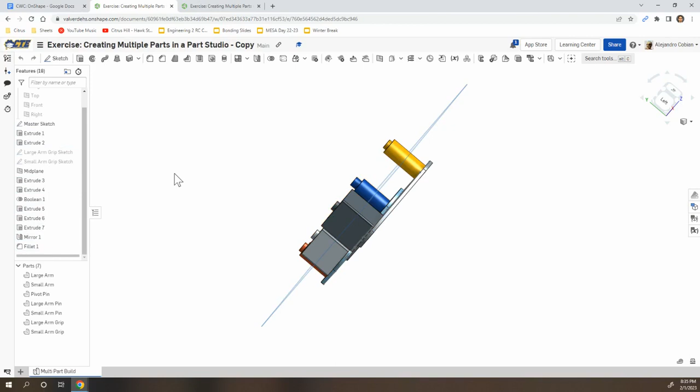For step 1, we need to create a copy of this public document right here. Notice we have a 2-dimensional sketch. Go ahead and click on this and make a copy. This is what you should be seeing.

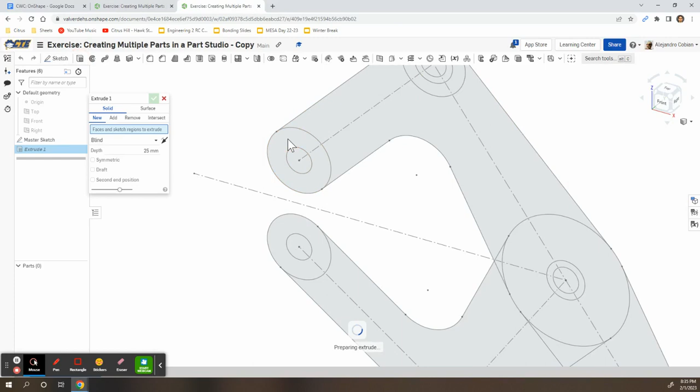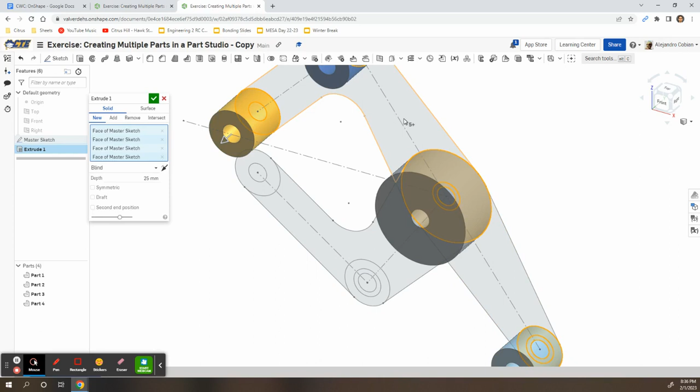For step 2, we're going to extrude this large arm. Go ahead and click on extrude. You're going to select the following circles, this one right here, and notice we are on the front view here. We're seeing the right, the top, the front, but we're working on the front plane. We're selecting this circle, also this one, creating that one, this one right here, and we're also selecting this portion here and that. Let's curve this around. We're also going to select this and this little item right there. This will be solid, new, blind, and the depth will be 5 millimeters.

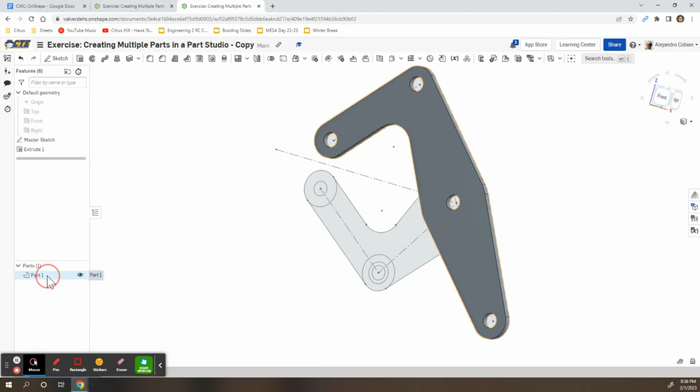Let's go ahead and switch that and hit the check mark. This is what we should be seeing. We're going to go ahead and rename this as large arm. Go ahead and right click on part 1, rename large arm. Right here, we're just being reminded in step 3 to make sure that we're viewing the master sketch.

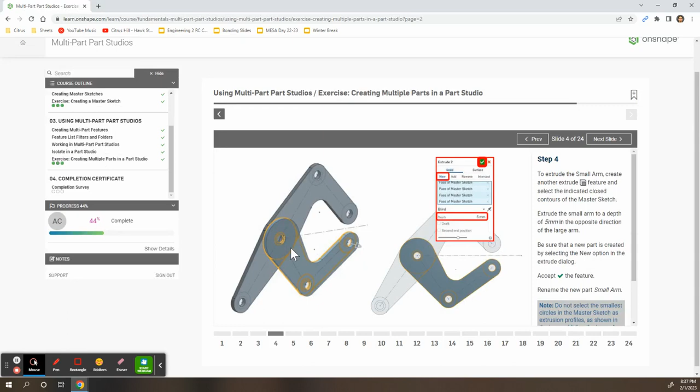For step 4, let's go ahead and hide the large arm. We're going to go to the back side, and at this point, go ahead and click on extrude. We're going to create this piece right here for the small arm. Go ahead and select this circle, this inner circle right here. Let's make sure we view the back piece, this portion, this little point, this arm here, this middle circle, this circle right here. At this point, make the depth 5 millimeters.

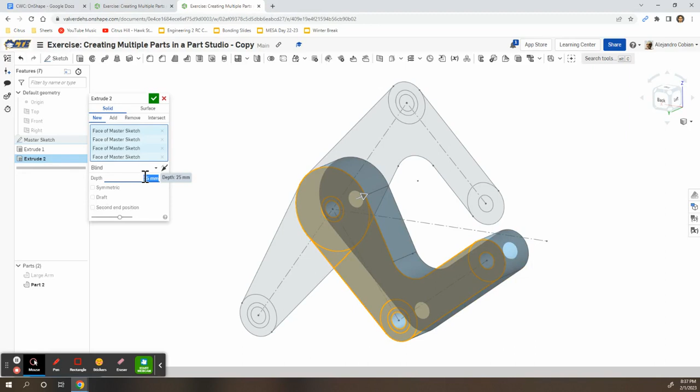Notice that we're also creating a new part. At this point, let's go ahead and view the large arm. If you notice, the small arm and the large arm are connected together, so let's go ahead and reverse the direction. We want to make sure that they are on different planes. Go ahead and hit the check mark.

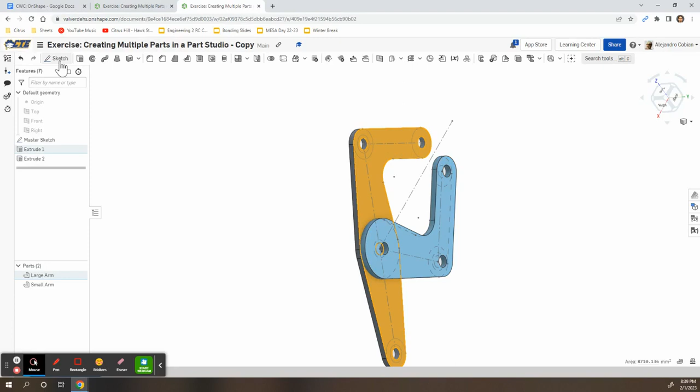They are separated. For step 5, we're going to create a sketch plane on the large arm. So once again, we are sketching and we're on the face of the large arm, but we're on the back side of the large arm. We're going to hide the master sketch and rename this as large arm grip sketch.

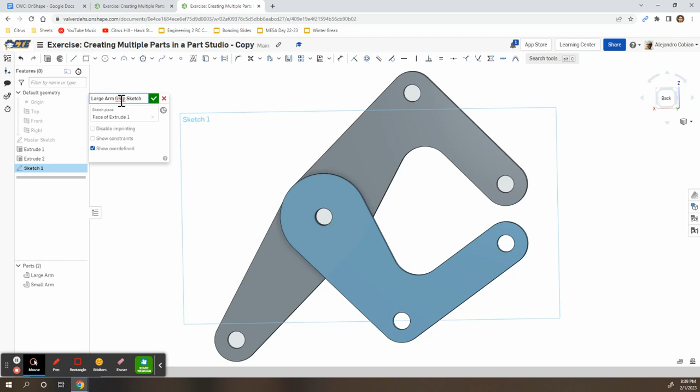Step 6, we're creating this square with a triangle. Let's zoom in this area here, make sure we're on the back side, and we zoom in. At this point, let's go ahead and click on use project convert. We're going to click on the circle, and notice now our circle is part of our large arm grip sketch.

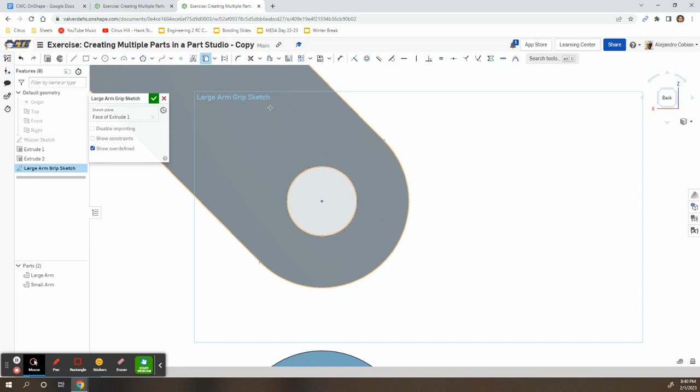Let's go ahead and click on center point rectangle. Click on the point right at the center of the circle. We're going to make this a little larger. We're going to make our triangle on the inside.

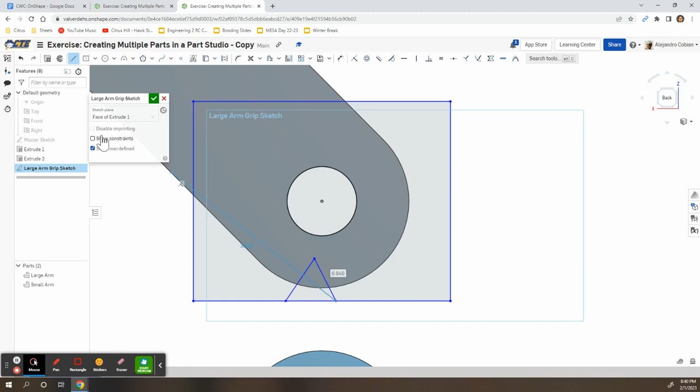So far we have these relationships where all of the points in the triangle are connected, and the endpoints of the triangle are connected to the rectangle's bottom line. And then we also have the rectangle centered at the center of the circle.

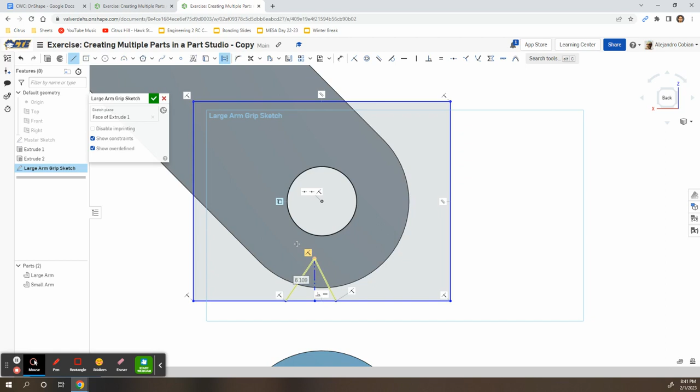We're going to also create a construction line that is connecting the rectangle's bottom line to the top point of the triangle. At this point, let's make sure that this construction line is vertical, so add a vertical relationship to it.

We're also going to place this line at the midpoint of our bottom line of the rectangle. Go ahead and click midpoint and select this line. I want to make sure that these two lines are equal to each other.

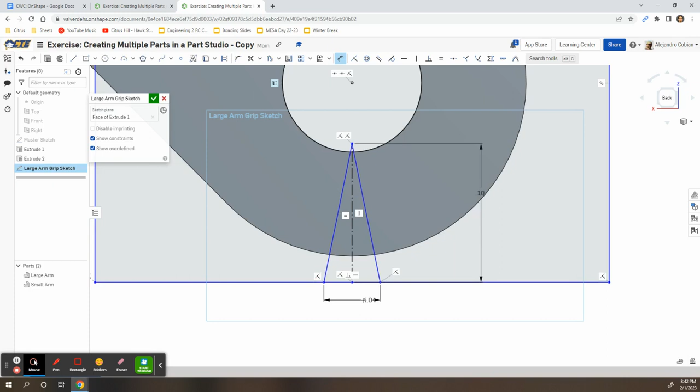Now for some dimensions, the height of this line right here will be 10 millimeters. The distance from this point to this point will have a value of 10 millimeters. Now we want to go ahead and view our master sketch, and we're going to add a distance from this bottom line to the master sketch with a value of 1 millimeter.

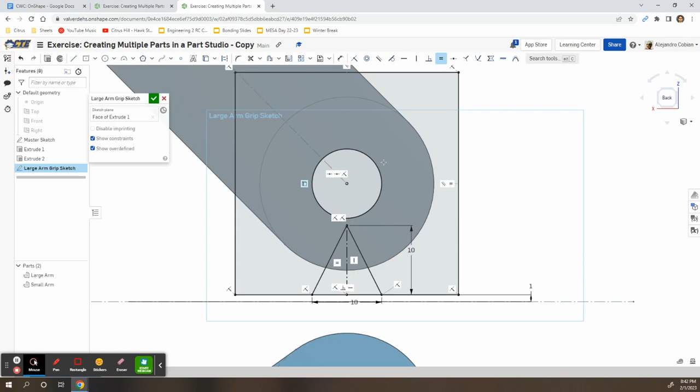For a square, let's make sure we add some equal relationships. Make sure that every line looks black, that we have no blue lines. In this case, everything is fully defined. Let's go ahead and accept this sketch.

At this point, we're going to create another sketch on the small arm on the back side. So let's zoom out. Let's go ahead and click on sketch. Let's hide our master sketch, and let's click on our small arm. We're going to zoom in on this area here.

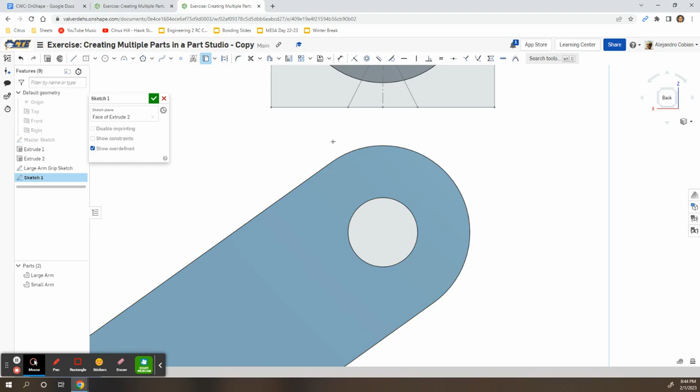For step 8, we're just replicating all the dimensions that we used for the square up above. So let's go ahead and repeat this process. Let's project our circle on the small arm, and let's go ahead and create a center point rectangle centered at the origin of the circle.

We're going to create our triangle, just like what we did earlier, and show our relationships. We want our construction line right at the midpoint. Notice I'm already creating a midpoint relationship with the top line and the bottom point of this triangle. Now for our relationships, we're setting these lines equal to each other, and then making sure this line right here is vertical. We're going to add a few dimensions.

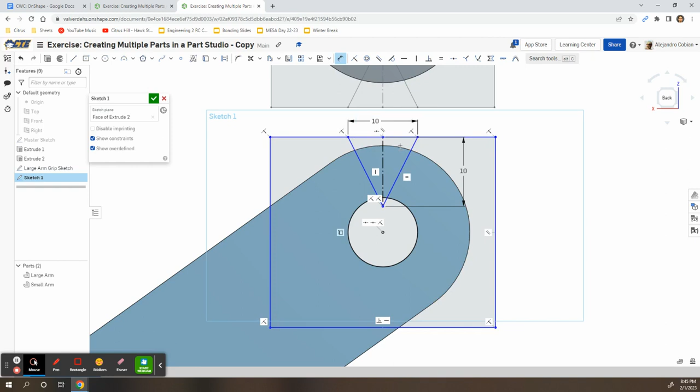This line will have a length of 10 millimeters, and the distance between these 2 points will be a value of 10. We're also going to set this line equal to this line here, and this line equal to this line.

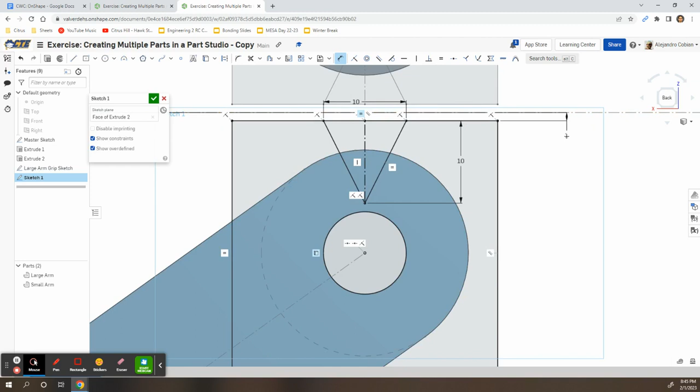However, we're missing one item, so let's click on Master Sketch. At this point, we need to add a dimension for the distance between this top line and the center of the master line, which is a value of 1. At this point we're good to go. Let's accept this, and we're going to rename this as Small Arm Grip Sketch.

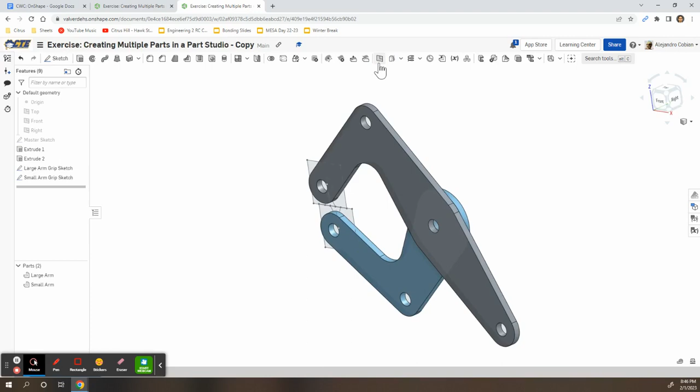Step 9, we're going to create another plane. Let's go back to our front side and hide our master sketch. Select plane, and click on the face of extrude number 1. Notice we're selecting the front plane. We're offsetting this plane by 25 millimeters, and if you notice, we're going in the opposite direction. Go ahead and rename this as midplane.

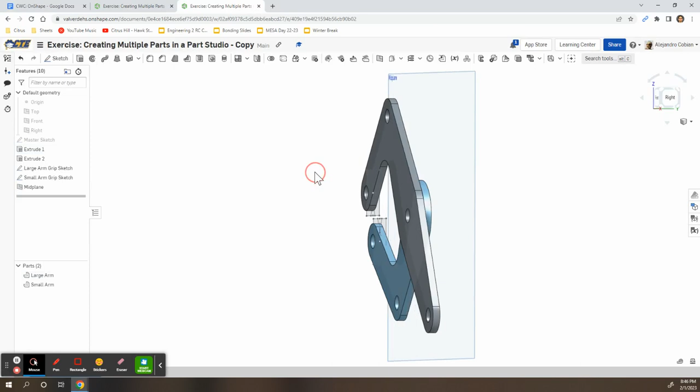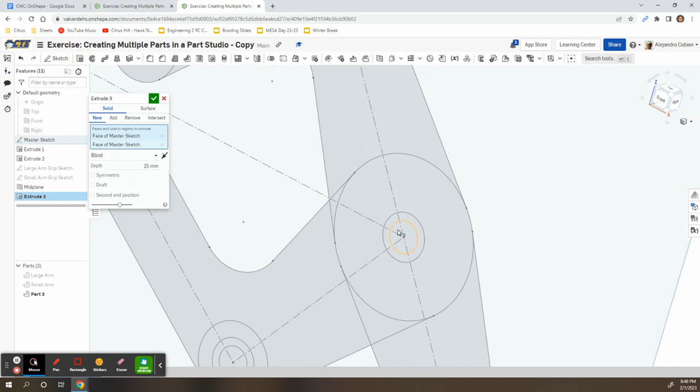And accept. For step 10, we're going to create these 2 pins right here. They're both connected to the large arm. So let's hide our large arm and then our other 2 sketches, and all we want to view right now is the master sketch. Let's click on extrude. We're going to select this small circle, the medium-sized circle, then this circle here, and the medium-sized circle again.

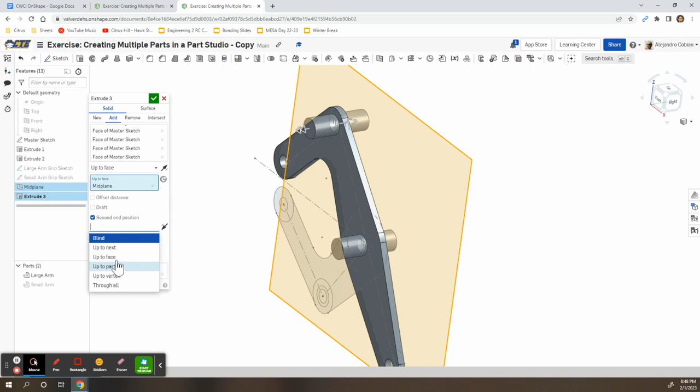At this point we do want to select solid new. We're going to create up to face, and select the midplane. Now let's view our large arm. We're going to add a second end position, and click up to face, selecting this face of the large arm, the front face of the large arm. However, we want to make sure this is a new item, so once again click solid new, and accept.

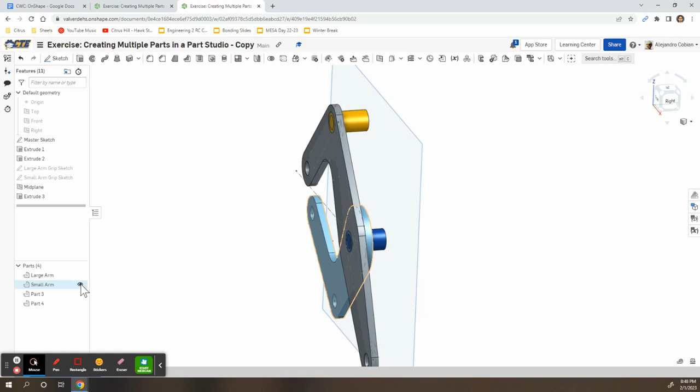Notice we have 2 pins here, and now we can view the small arm. We're now going to rename this part right here as a pivot pin. So rename part 3 as pivot pin, and the yellow pin will be called large arm pin.

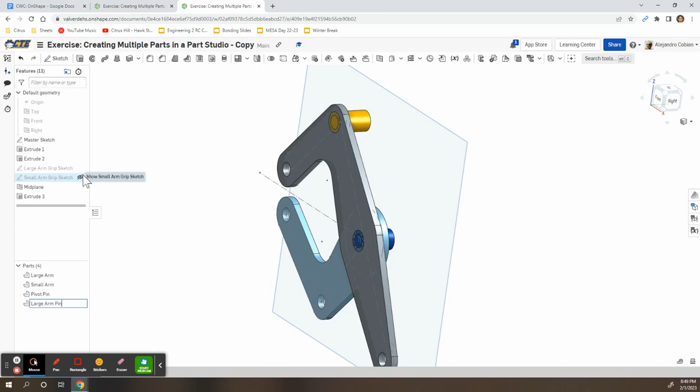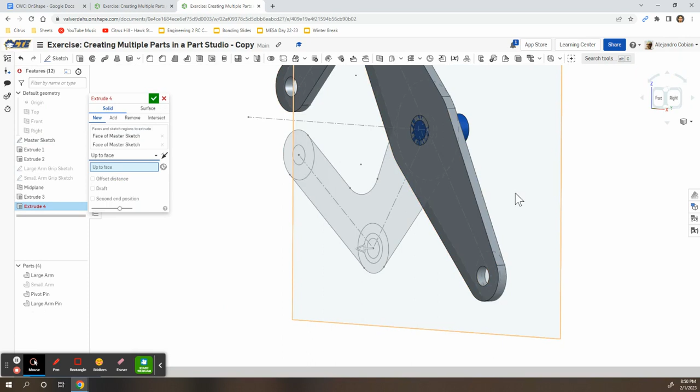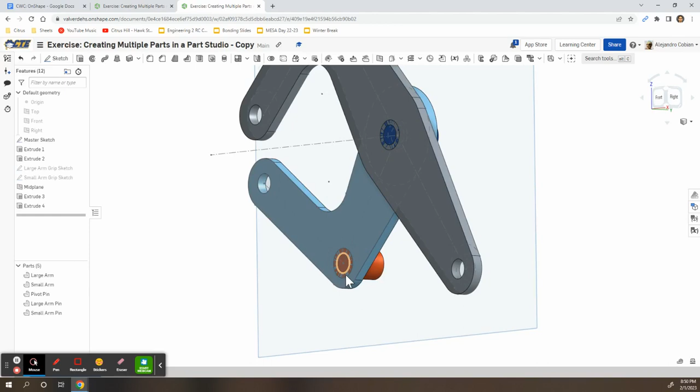Now we're going to add a pin on the small arm. Let's hide the small arm for now and select extrude. We're going to click on this circle, then this mid-sized circle, click on solid new, select up to face, and go up to the mid plane. At this point go ahead and accept, and this will be renamed as small arm pin. Let's view our small arm. Notice that this pin is already flush with the back side or the front side of the small arm. So we're good to go.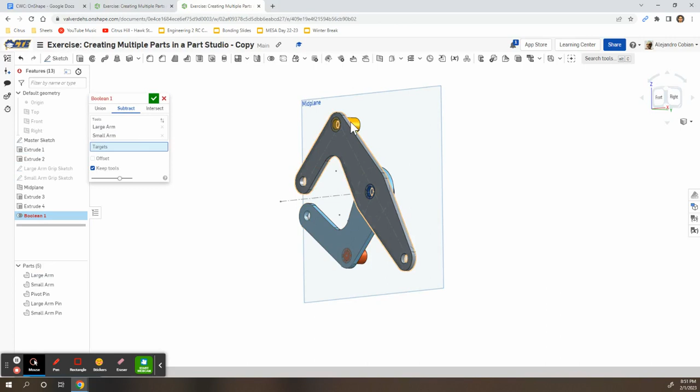For step 12, we're going to use a Boolean function to subtract out the large arm and the small arm from the pins, creating this subtraction right here. Go ahead and click on Boolean, and select subtract. Our tools will be the large arm and the small arm, and our targets will be this pin, this other pin, and our final third pin. Go ahead and click Keep Tools, Accept. Now we hide our large arm and small arm. Notice our subtractions are created, and we're good to go.

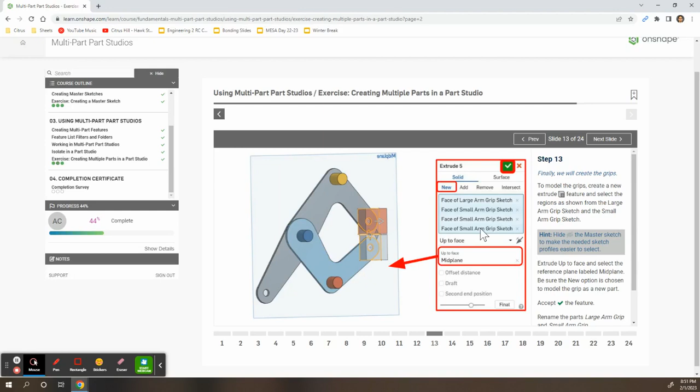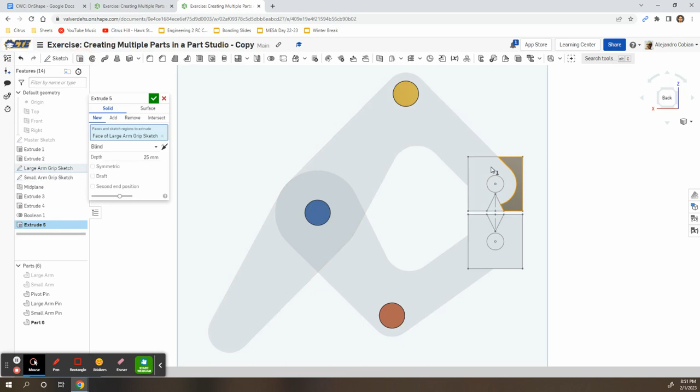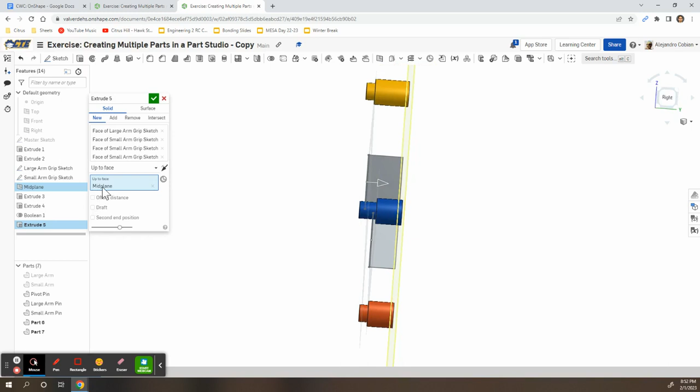For step 13, we're going to create these grips right here. Let's hide our large arm, our small arm, our master sketch, and just show the large arm grip sketch and the small arm grip sketch. We're going to select Extrude, click on this portion here, this item, this section, and do the same for the area below. Notice we have our extrusion created, and we're going to select up to face. Notice we have solid new, and the face we're selecting is this plane we created earlier, called the mid plane. So that's all it is. Once again, it should read mid plane right here. We created this earlier, so go ahead and accept.

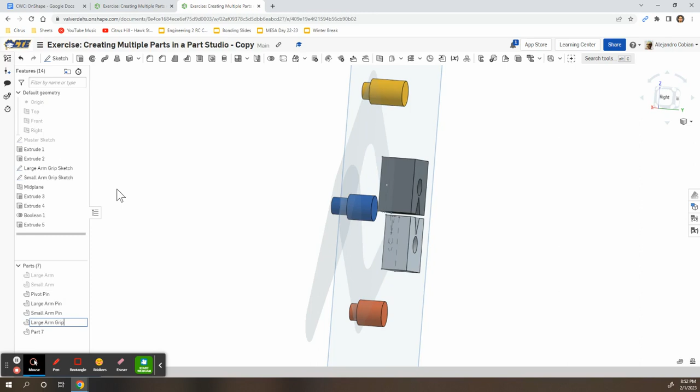This item up here will be called the large arm grip, so we'll rename this as large arm grip. This other box down here will be called small arm grip.

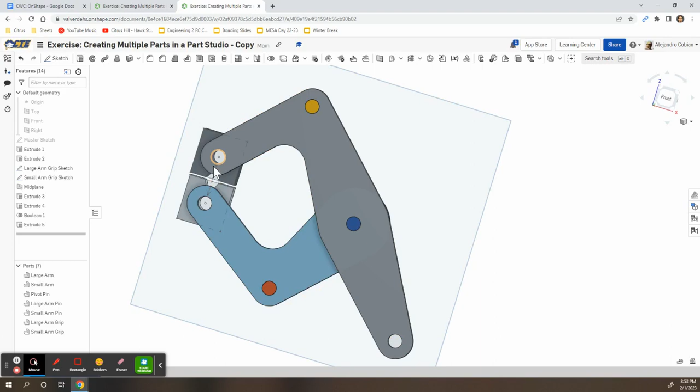These 2 features right here are flush with the mid plane, so we're good to go. Let's go ahead and check on our large arm and a small arm. So now we have these cavities here. We're going to go ahead and fill those in during our next few steps, and then we'll finish up.

For step 14, we're going to go ahead and fill in this cavity. So we're going to hide our large arm and a large arm grip. We're going to select Extrude. Let's click on this circle right here for the large arm grip. Notice this is the face of the large arm grip sketch, not the master sketch, so make sure you select this. We're going to select up to face.

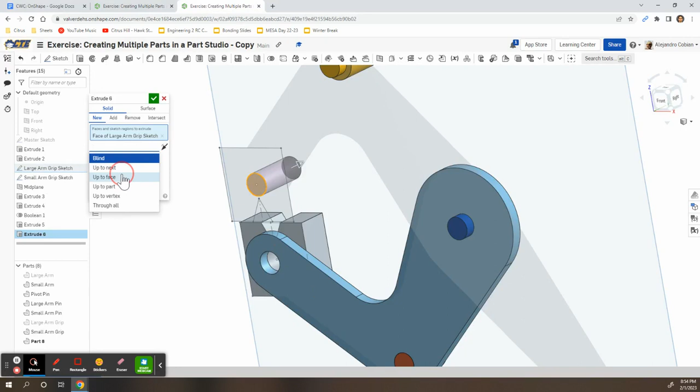And our first face will be the large arm. So let's go ahead and select this face right here. We're going to show this, and we're selecting the front face. We're going to add a second end position. And at this point, let's go ahead and hide the mid plane, and we're going to view our large arm grip. So now our second end position will be up to face, and we're selecting this face right here. Notice we filled in the cavity, and we're going to add this, and we're merging with our large arm grip.

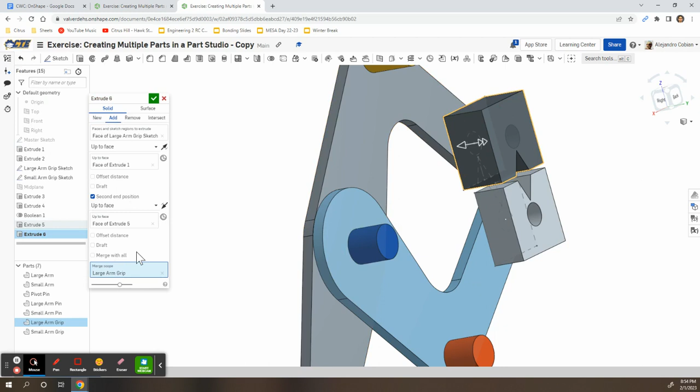So make sure we click this right here. So once again, we're on solid, add, and we're adding our new piece to our large arm grip. Go ahead and accept. And our cavity has been filled.

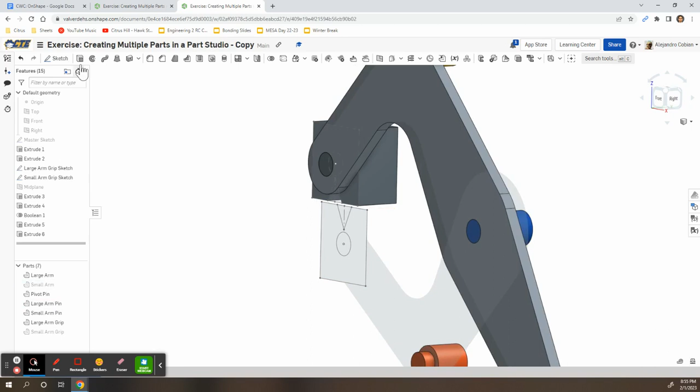Now we're going to do the same thing for this hole right here. So go ahead and hide your small arm grip. Let's go ahead and click Extrude. We're going to zoom in. Let's click on this circle right here. We're going to add. We're going to select up to face, and our first face will be the small arm. And once again, we are selecting up to face, we're selecting the front face of the small arm.

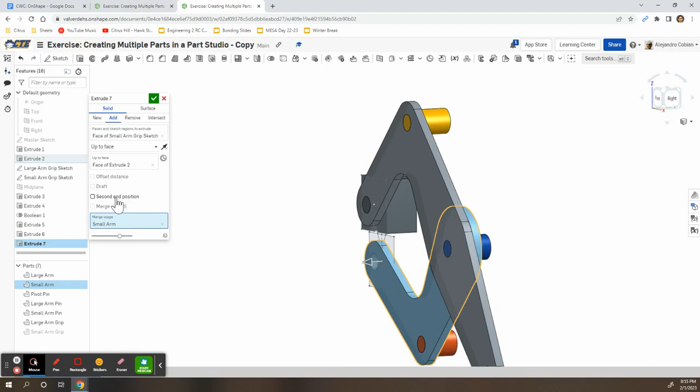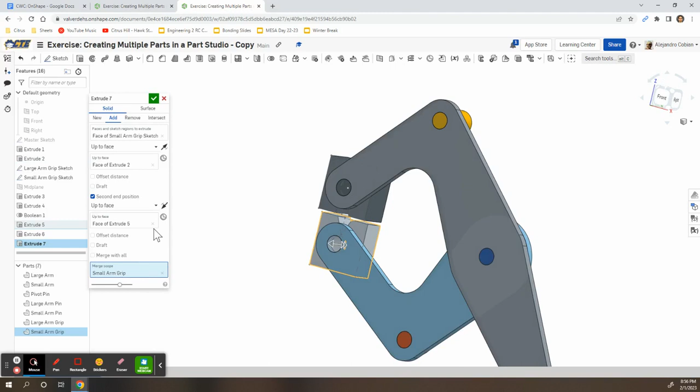Now we're going to add a second end position. We're selecting up to face. Let's go to this other side over here. Let's go ahead and view our small arm grip. And let's select this face of the small arm grip. And now we filled in the cavity. However, our merge scope will be with the small arm grip. And let's get rid of the small arm. And let's go ahead and accept. So now notice both of our cavities have been filled.

So we're good to move on. Step 15 is what we did earlier. So let's move on to step 16.

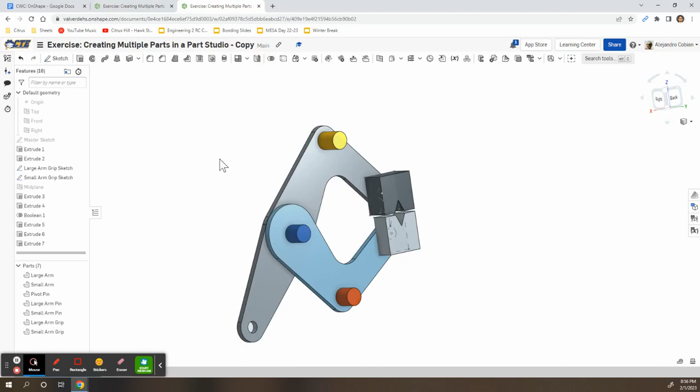For step 16, we're going to use a mirror function to mirror out the grips and the pins that we just created. So go ahead and click on mirror. We're going to add entities to mirror. We're selecting our 3 pins and our grips. And our mirror plane will be the face of our large arm grip. And this is what we've created. And go ahead and accept.

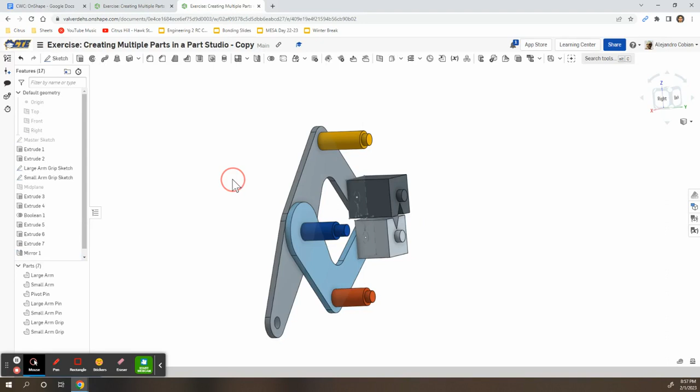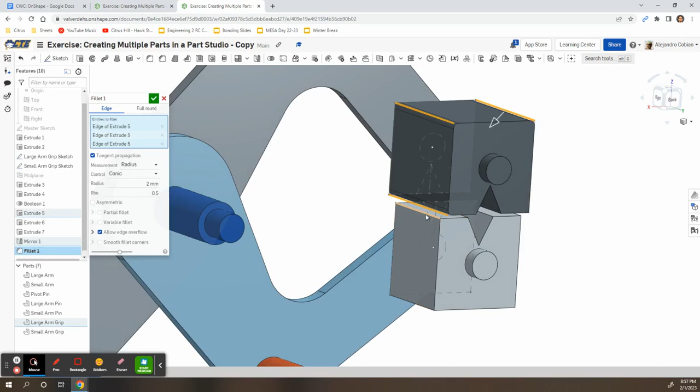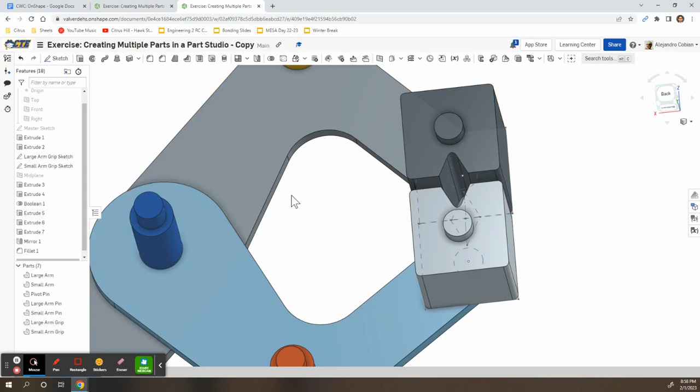Now for step 17, we're just verifying that we have these items created right here. For step 18, we're using the fillet feature. Let's view the backside, zoom in on these items, and angle it. So go ahead and click on fillet. We're selecting the 4 corners of each box, these corners here and then these other side corners. And then we're going to select this middle section right here, and then the middle section right up above. At this point, we want to select tangent propagation, radius, conic, 2 millimeters, and go ahead and accept. And we just rounded out the 4 corners and this center section.

For step 19, we're going to assign a new material, so go ahead and click on all of these items here. Then right click, assign material for the 7 parts. Just type out 1060. Go ahead and type out 1060. And aluminum should pop up. Go ahead and select it and accept.

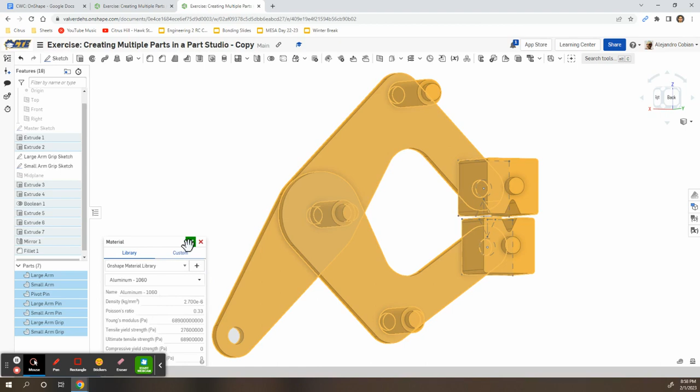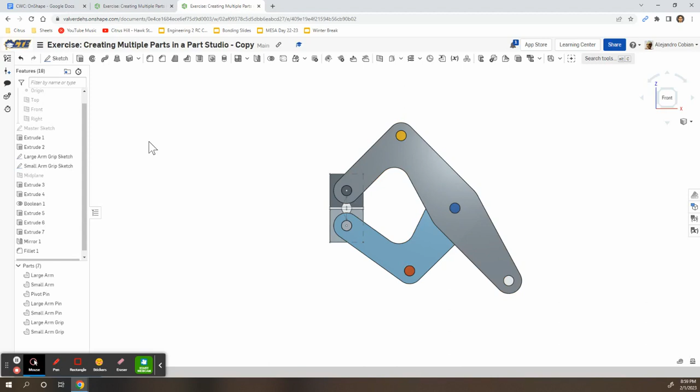Step 20, we're not doing much, just doing a little recap. For step 21, we're going to change up these dimensions so that we can see the power of the master sketch. So let's go back to our front side. Overall, we're going to make every part larger. So let's go ahead and click on master sketch.

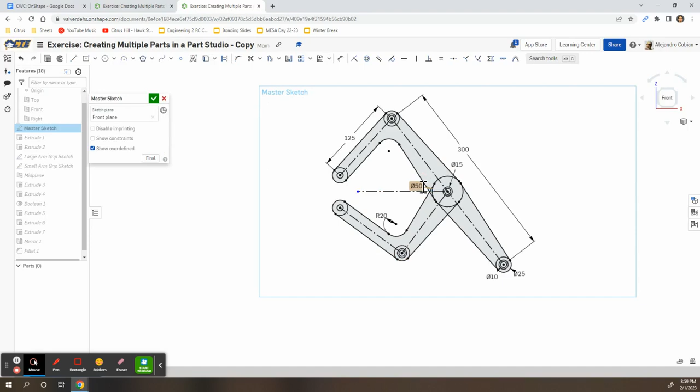And let's start with this massive length right here. So instead of 175, we're putting a value of 300. It's going to look a little awkward. Let's go to this value of 75 over here, and let's add 125. This value right here, let's add a value of 20. Here we're going to add a value of 75. For this number here, instead of 15, we'll have a value of 25.

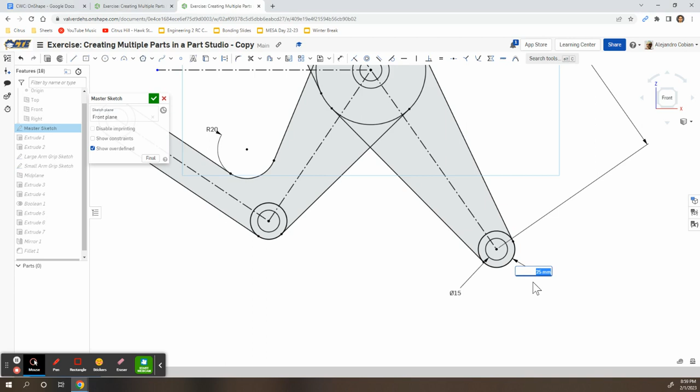I'm going to move that a little bit. And then this circle right here, the small circle will have a value of 15. While our larger circle here will have a value of 45. Oops, 45. Notice everything's a little bit bigger, so we're good to go.

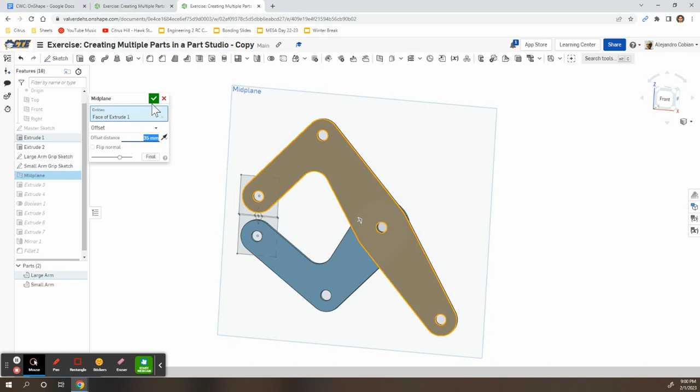Now we're going to adjust the midplane and extend it out a little bit more to a value of 35. So let's go ahead and click on midplane and type out a value of 35 and accept. So let's go back and forward. We extended out our pieces by just adjusting the midplane.

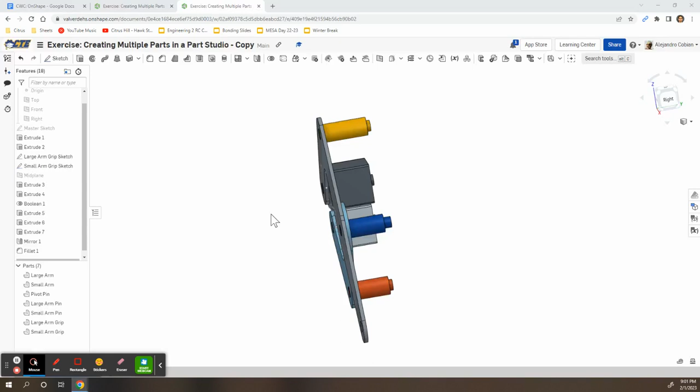Let's go to step number 23. At this point, we don't have much to do for step 23, we're just doing a little recap. For step 24, you're going to select all of these pieces right here. And then you're going to click on the mass properties. And you'll be using this value for your self-check.